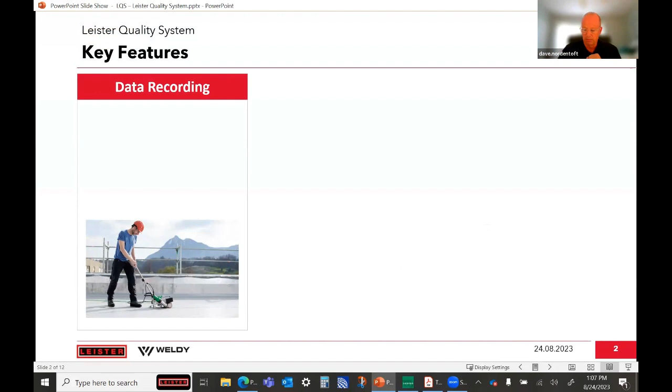So what's happening in the background of any LQS-enabled machine is we are recording the key welding parameters, such as the temperature and the welding speed and the air volume. Every time that the nozzle is inserted and the welding process begins, that information is being recorded in the background on the machine. And the machine has in excess of 7 gigabytes of space on it. So there's the capacity to record thousands of records on the machine. And so we're tracking these key elements every single time that the nozzle is inserted.

But we're also tracking another key thing that is really kind of the first time that we've been able to do this. We're tracking the incoming voltage that's coming into the welding machine. And what we have found in many instances where there's quality control problems or machine performance problems, it's tied to the power supply that's coming into the welding machine.

So these are all machines that are operated on job sites, all off of portable generators. And what we find is that there's quite a range of quality in the generator side of the business as well. And so it could either be a poorly maintained generator or the improper line cable or any combination of that that can ultimately impact what's happening with that welding machine. It can cause damage, but even if it's slightly improper voltage, whether it's over voltage or under voltage, we found that it still can impact some of these welding parameters. And at the end of the day, if the operator isn't aware of some of these changes, then it can impact that quality, but they wouldn't even really be aware of it.

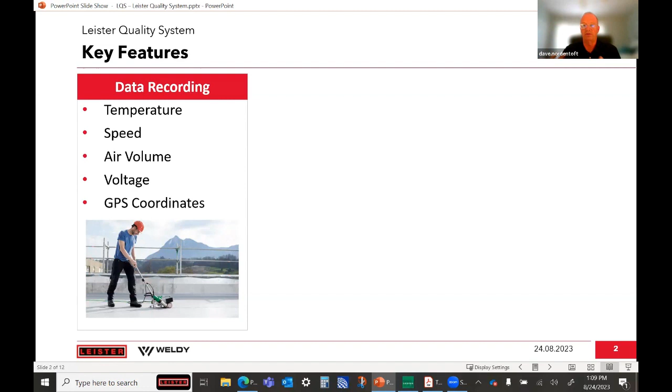So now we're recording this information in the background, and so we can find and be able to track that information. And also at the same time, we're capturing GPS coordinates. And really we're doing this as a way to be able to say, okay, we're working on this project. We're capturing the GPS coordinates at the beginning and the end of each welding seam, again, to sort of corroborate this is where we've captured this information. This is where this information is coming from.

So we're able to take and harvest this data and analyze it. So there's a tool, a mechanism within the My Leister app that allows for the data to be analyzed on screen, whether it's through the mobile device or through the desktop. And then at the conclusion, we're able to take this data that's been harvested and create a data report from it. So it's the ability to create a PDF or CSV file that is, on one hand, an archive record of what transpired during the welding process on a project. At the same time, it's also shareable.

So if there's any other individuals that may have an interest in what happened with this welding process, perhaps it's a building owner, perhaps it's an architect or a roof consultant, perhaps it's someone from the manufacturing community that may also either want or need access to that welding data, it's shareable to anyone who would want to have access.

The contractor has the ability then to use this as a tool as well. Say, okay, I possess this data. At the end of the project, let's go back, let's review the data. If there's any anomalies, anything that looks like it's out of line, let's use this as a tool to go back one more time. Let's check to make sure that everything looks good from a quality control standpoint before we take our last step off of this roof and move on to our next project.

The other thing that happens, let's be honest, sometimes it could be years down the road, could be incidents that happen, something happens that maybe questions workmanship or quality down the road. This contractor now has an archive of what they did, which would capture all the information about temperatures and speeds and that sort of thing, and they can come back and they can say, here's what we did.

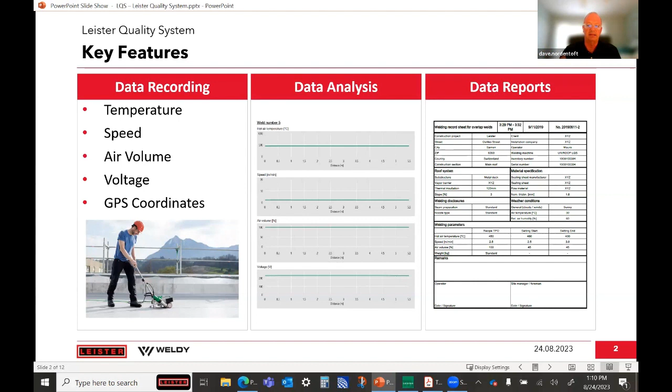One of the other key features in the machine is a feature that we call Monitored Welding Assistant. So what Monitored Welding Assistant does is give the user the ability to go into the display and set parameter limit ranges plus or minus for those key parameters like the temperature and the speed and the airflow. So they can create a range plus or minus from those set points.

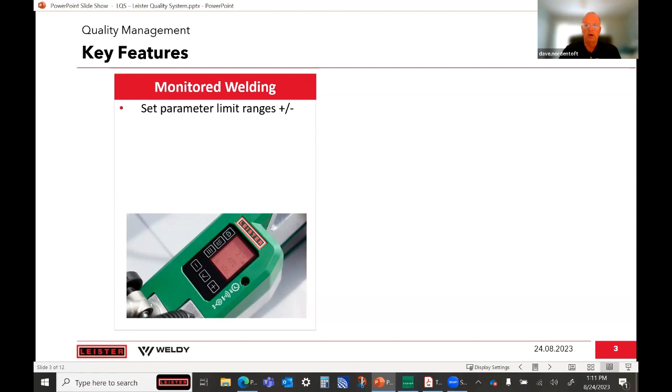The thought process behind this is that, if there's anything that happens during the active welding process, whether it be a mechanical issue or electronic issue that would take one of those settings and move it outside of that parameter range, you're going to get an audible alarm and a visible flashing red display that's going to provide information in real time to the operator that would say, hey, whatever's happening here may possibly affect weld quality.

Our temperature has changed beyond a certain point. Maybe we've moved outside of our welding window. It's possible that whatever's happening here could affect weld quality. So the thought process would be, let's stop the welding process. Let's assess conditions. Let's take corrective actions before we continue the welding process any further. So it's a bit of a stopgap measure right there, right in real time to tell the operator, we should stop the welding process. Let's assess before we go any further.

There's an additional feature that's built in as well. They choose to activate it. It's called Stop Device on Alert. It's tied directly to this monitored welding assistant. So if Stop Device on Alert is active, that monitored welding assistant is activated and the operator takes no action, within 30 seconds, the machine will then go into shutdown and cool down mode. So again, as a safety net, to just say, hey, listen, something's happening here that we should not be continuing. The machine will shut itself down.

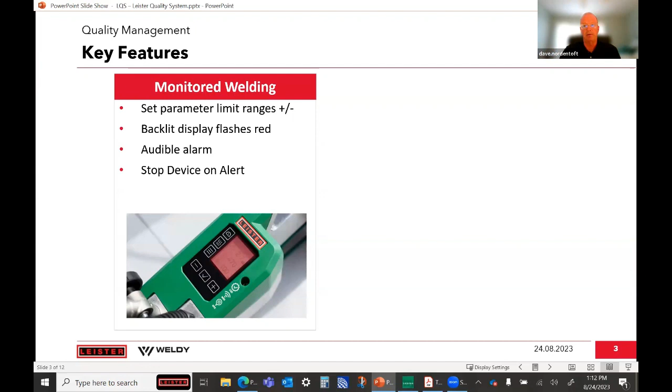One of the other key features to the machine is what we call recipe management. So what this allows users to do is create their own custom welding recipes. Really all we're doing is creating combinations of temperature, speed, and airflow. And so you're going to have different ambient conditions. You're going to have different membrane mil thicknesses and that type of thing. And so it requires different combinations or recipes of those three welding parameters.

And so the user then has the ability to go in and create these custom recipes right in the Leister app. Those can be then transferred and saved onto the individual machines. Those recipes can be saved directly into the display as well. But what it allows you to do is, let's say you have 3 machines, you can create these custom recipes and you can drop them onto all 3 of the machines that you would have in your fleet. And that way, everybody who's operating is kind of, in a sense, working out of the same hymnal.

So if we're working on a hot summer day and we're using say a standard 60 mil TPO, the superintendent or whatever can say, okay, we're going to use XYZ number 1 today as our starting parameter. And again, I kind of stress that these are starting parameters, right? Because we get asked very often by users, what welding temperature should I be doing? What speed should I be doing? And it's really almost an infinite combination, and it's unique to the individual day.

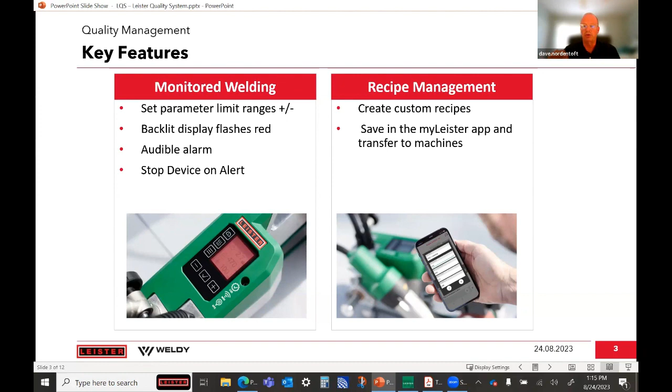So it's like, if I think that self-driving is the be all end all, and that I'm always going to get into a vehicle that's self-driving, I'm going to make it home safe. So go ahead, Dave, go ahead and sleep the rest of the way on the way home. I would be very stressed out about that. And I equate this to the same thing. It's like, yeah, these technologies are fantastic, but it doesn't remove the end users from taking the responsibility for quality management, quality control, and doing all the right things and following all the best practices that they've learned in the industry.

So how does someone get started with the process? So step number 1, if you're going to be buying your first LQS-enabled machine, you want to download the Leister app. It's available on Android, iOS, or Windows versions. So you can run it on a mobile device, a tablet, a desktop, or a laptop. And step number 2, after the app is downloaded, is to create a Leister cloud account. I typically recommend that users consider creating a generic Gmail account that could be a universally shared login for those in the organization that might ultimately need to use this data. So moving beyond that, just to give you an idea, after the app is set up, this is what the dashboard looks like on the mobile and the desktop versions.

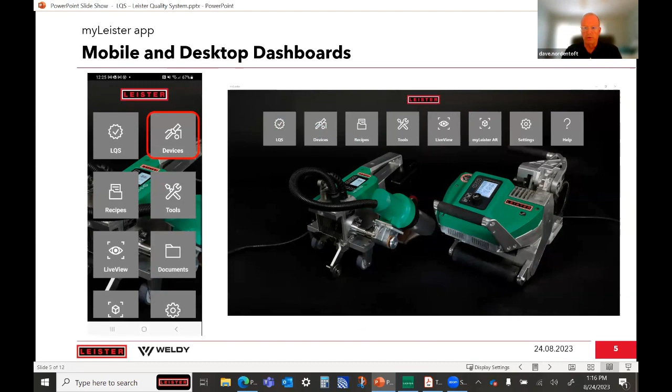So I own my device now. What's the next step after I've set up my cloud account? It's time to start registering the machine. So they would use this device icon to enter into the menu system within the system. And you'll see there's an opportunity then to hit register new machine. At that point in time, you just follow the on-screen prompts. And now that machine is going to be paired to your cloud account.

So a lot of people ask, well, how does the communication take place between my mobile device and this new welding machine? Well, it utilizes Wi-Fi technology. So each machine will put off its own unique Wi-Fi signal that will be picked up by the mobile device running the Leister app.

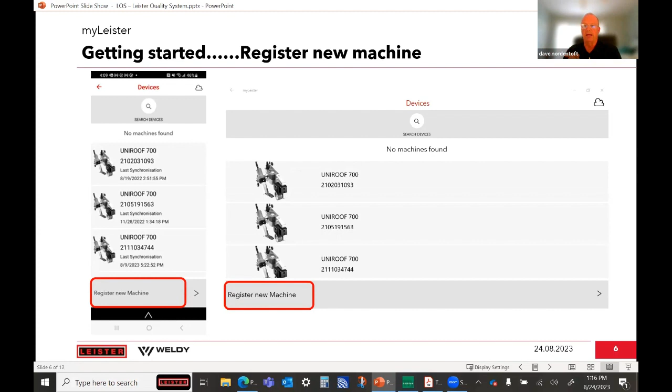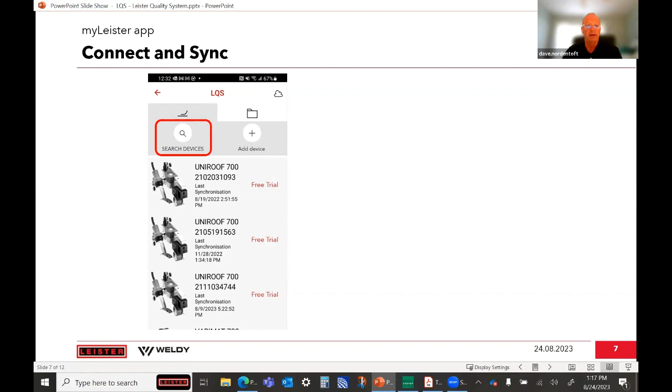So when it's time to connect and synchronize, it's as simple as going into the app, into the LQS portion of the app, and clicking on search devices. At that point in time, the mobile device begins to search and look for that Wi-Fi signal. The machine needs to be on in order to do that. And so when that connection is made, what they'll see then is the machine turn green. So that's an indicator then that that machine is actively connected to that mobile device running the app.

So let's just say that on my first time I've used it, I've run my series of welds that day, and I'm interested in getting access to that data. Well, how does that happen? How do I get a hold of that information? Because right now it's on the machine.

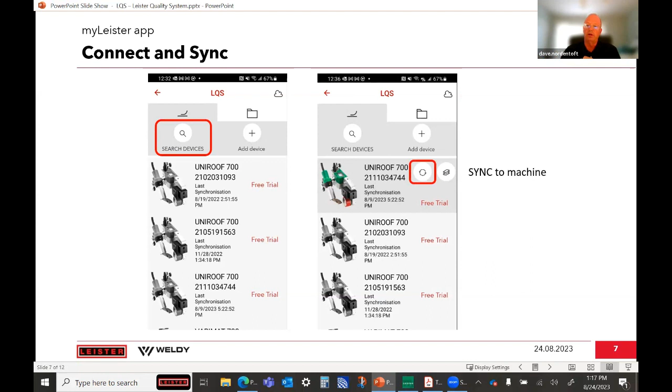So the next step in the process, now that I've connected to my machine, I'm going to do a synchronization. So I'm going to sync to the machine, just simple click of that button right there. So what that'll do is it'll pull the information from the machine. It'll bring the data into the app on that mobile device. So really all the mobile device has to be is within Wi-Fi range of that machine.

And at this point, a lot of people will ask, well, how often do I have to do this? I mean, do I need to do this every 10 minutes? Do I need to do it once a day, once a week? It really is up to the end user to decide how often they want or need to have access to it. There's really no hard and fast rule about this.

So after this information is in the mobile device, it's currently only in that one mobile device. So no one else has access to it. It's just on that one device. So the way that it gets shared and becomes shareable with everyone who is a user or a potential user is to then synchronize this mobile device to the cloud account. So in the upper right-hand corner of the app, you'll see a cloud.

So when this mobile device is in the presence of a Wi-Fi signal that has internet connection, so let's just say we are connected to our machine, we shut the machine off, so we cut that Wi-Fi connection. It doesn't have to be immediately, it could be when you get home or when you get back to the office or wherever. When you're in the presence of an internet connection via Wi-Fi, you hit that cloud, and then it takes that data and it puts it into the joint cloud account.

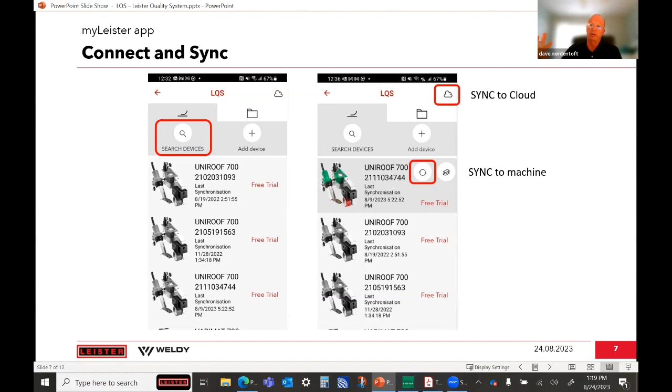So that now anyone else could be in the office, could be in an office in another state. If they're running the myLeister app, they use that joint login credential, log into their myLeister account, click the cloud to sync to the cloud account. That information then comes into their app version. So they can look at it again, whether they do that on a mobile device, whether they do it on a desktop, doesn't really matter.

So what's it look like when we want to review and take a look at the data once it's been pulled from the machine? So again, we're in the LQS portion of the app, and we click on the machine that was just used. You'll see the date stamp and the records that were pulled at that time.

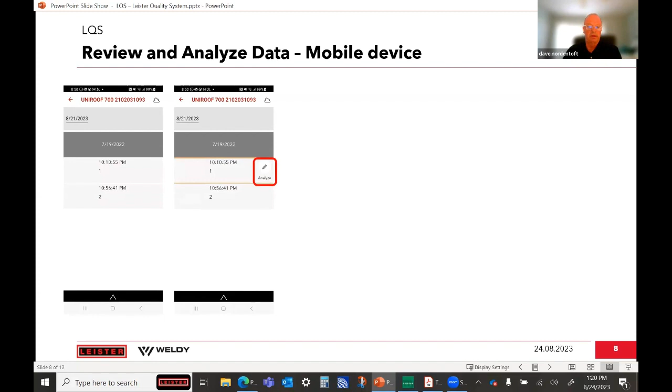And so if you click on the first line, line 1, there'll be a button that'll show Analyze. So this gives you the ability to analyze the data right in the app. So again, you can do this from the mobile device. You can do this from the desktop version. We're on the mobile device today.

So after I click Analyze, the next screen that I will see will be a table. And it's a table that allows the user to basically archive and document all the details about the project they're working on. So there's an opportunity to click Add, which will be a way to name and create their project name that they're working on.

And so it gives the opportunity to all sorts of information that could be populated in there about your company, about your client, about what kind of roof system is being installed, from membrane, the roof deck, ambient conditions on that day, you name it, A to Z. There's even a comment section at the bottom to add any other remarks that would be notable and something that you would want to make sure that you were documenting on that day. So to move beyond that screen, you're going to have to name the construction project in order to be able to move past the screen.

So you click Next. That'll take you into your first welding record. Okay, so what the welding records look like are basically like a series of EKGs. There's an individual graph for each of those captured parameters. We talked about temperature, speed, airflow, and the incoming voltage. So it's a drop-down menu that allows you to move from weld to weld, each one independently showing what was documented for those 4 key welding parameters.

And then finally, the last is a screen at the conclusion that would be kind of a summary record of all the different records that were pulled in. So I know in my particular instance and in my vision, I prefer to view the data whenever possible on the larger desktop version.

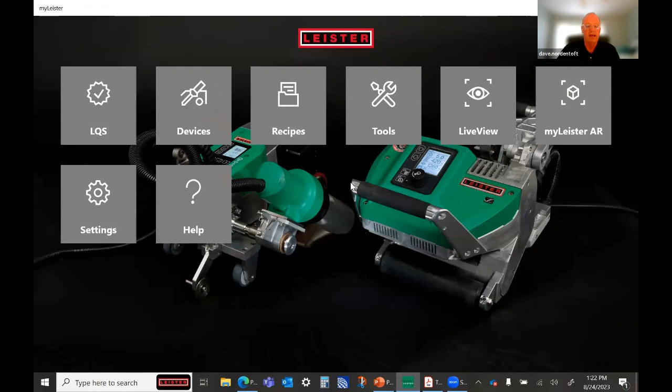So what I'll do is I'll take an opportunity here to kind of walk you through what the desktop version is live. So I'm going to go ahead and jump to my Leister app that I'm running on my computer, and we'll kind of walk through some of these same screens again, just to give you an idea as to how easy this is to work with. So again, if I want to view and analyze the data, it was as simple as going into the LQS tab, where I see the machines that I have in my inventory.

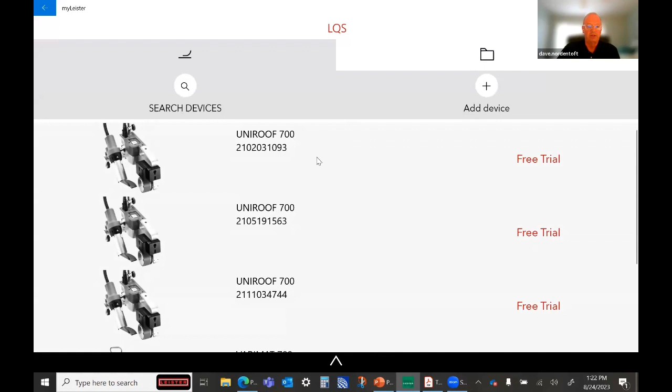So I'll go ahead and click on this first one, and it'll give me, again, the opportunity to take a look at the welding records. So if I do this, I click and I analyze. So I can analyze, again, right on screen. So this is the table I was mentioning before, where I have opportunity to document all the different information about the project. Now, I took the liberty before I started today to name a new project, the RT3 project.

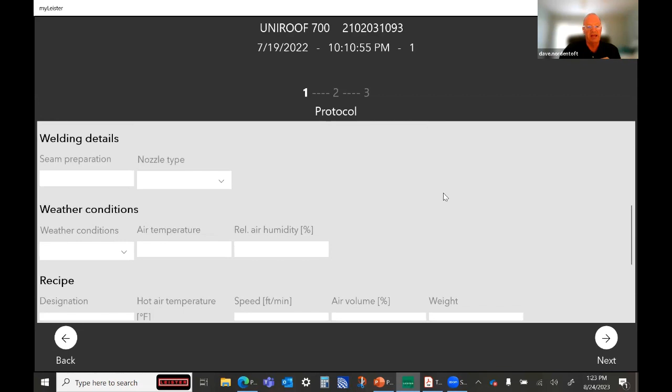And so what this allows me to do is create this project. And let's say this project goes on for 2 months. Every time that I retrieve data and I want to move it into the My Leister app, it allows me to go back and simply refer back to the same project that I'm working on with the dropdown, rather than creating a new one every single time I do this. It keeps it all together. So again, this gives you an idea of all the different information that we can populate in and save relative to the work that we're doing.

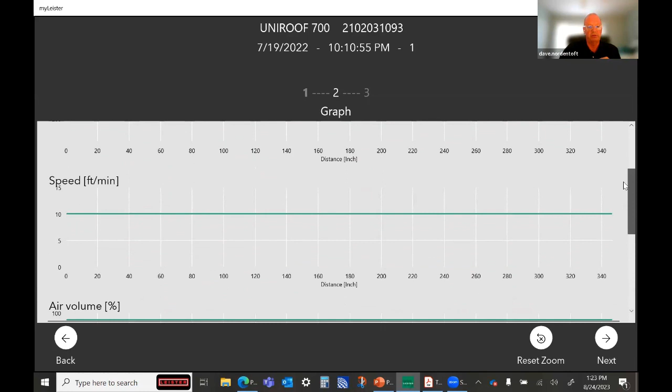So then to move beyond, we simply click the next, and this gives us our first welding record. So again, as I mentioned, you're going to see each of these parameters documented over distance. So what we're looking for, ideally, under ideal conditions, right? We're looking for nice, straight, flat, consistent parameters. No deviations, no anomalies. I know normally when I use the EKG analogy, we normally say, yeah, in this particular case, we're looking for flat line. Normally we're not, right? But today we're looking for flat line. So this is something that I wouldn't be that worried about, right? Everything nice and consistent, including my incoming voltage.

Okay. So let's take an example of a case where maybe we had something happen on one of the welds where the monitored welding assistant activated. So let's say we were actively welding and something happened that took one of our key welding parameters, again, outside of that range that we had established going in. Well, when that happens, that information is also archived and shown in the data report. How does that look?

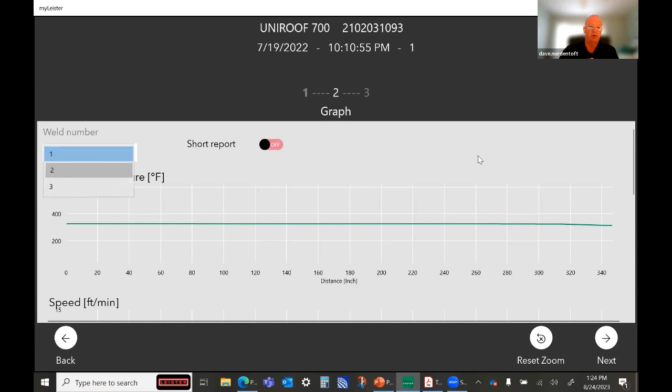So I go to weld number 2. Let's say the monitored welding assistant went off because there was a temperature deviation. It would appear in the data table like this, okay? And again, it's over distance and time, so we would see that over these distance intervals, this is where we had our incident.

Now, one of the things to think about, we would hope that these would be relatively limited in scope, because again, the thought process was when that monitored welding assistant went off, we stopped the welding process and we didn't continue to go. And so we would hope then that people took the corrective action necessary at that point in time and mitigate the amount of time that we were outside of our desired parameter range. Okay. So again, the next one can be viewed. Again, this one appears to be normal, as we would hope and expect.

So I have this data, but really what I probably care about the most is any of the data where there's these anomalies or these issues that potentially would have come up. So we can get to our information on this much quicker if we utilize this feature called short report. So if I click on this short report right here, what this does is it filters out all the welds that would be categorized as good. Those are the green flat line ones. And so now the only thing that's going to remain in my drop down will be any of the ones where we had an incident. So it helps us sort of just drill down right away and figure out where we think we had some incidents. Okay.

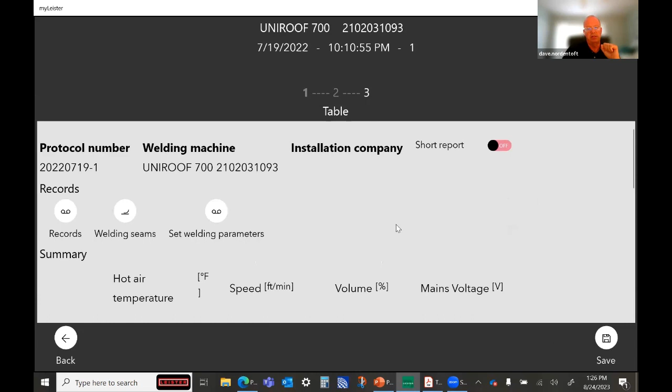So we move on beyond this into the summary table, where we have some different information still available at our fingertips. So if I go into the records tab, for instance, what this shows me, again, for each weld, it shows me distance intervals, and it captures a snapshot in time at that distance down the seam, what my temperature, speed, airflow, and voltage was, as well as my GPS coordinates. Now, in this particular example, I didn't capture any GPS because I was running this indoors, so I didn't have a GPS signal. So that's weld number 1.

And if I want to check weld number 2, I'm capturing the same information, but I will notice here anything that shows up in red would be an indicator that I was outside of my parameter range at that certain distance interval. Again, this is just a way to be able to narrow down and focus where we think there may potentially be a problem. Maybe there's not, but we're going to be able to use this information as a safety net to go back and say, hey, let's go find weld number 2 and let's double check that seam again and make sure that we're all good before we take that last step off of our project, and so forth.

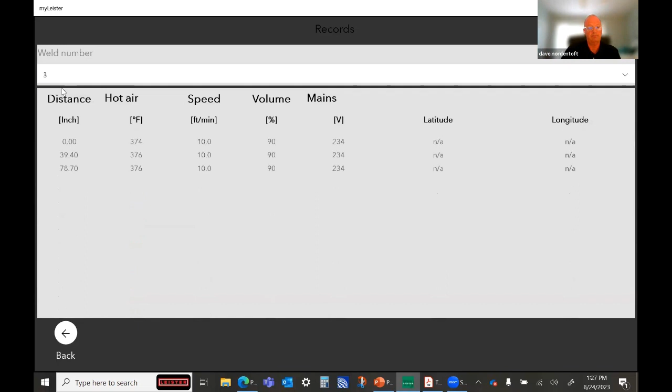The welding seams tab right here, if we go ahead and click on this, one of the things you'll notice here is we have each individual seam numbered, and it provides us the total distance of that seam, also latitude and longitude. Now here, this is the oh, by the way part of the technology that I also like to make sure that I point out to contractors, because this gives a contractor an opportunity to actually pull productivity information out of this. Now, we didn't really build this as a productivity tool or a productivity measuring tool, but the oh, by the way is it's there, right?

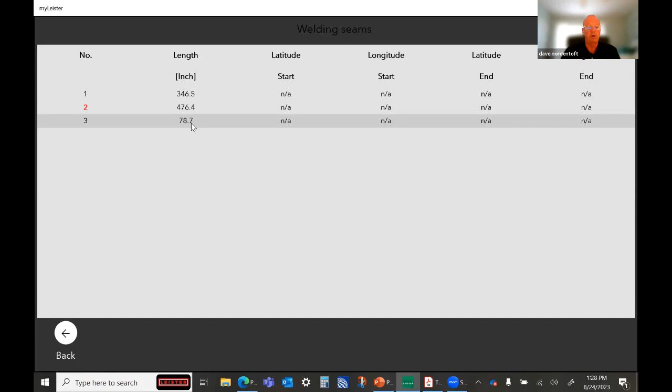So if I harvest my data, let's say at the end of every day, I can go back into the data and I could say, okay, well, we did 21 welds today and it totaled X number of lineal feet. Well, I could begin to use that as some sort of productivity gauge. So, you know, we didn't bring it out as a productivity tool, but it's certainly worth mentioning to the contractors.

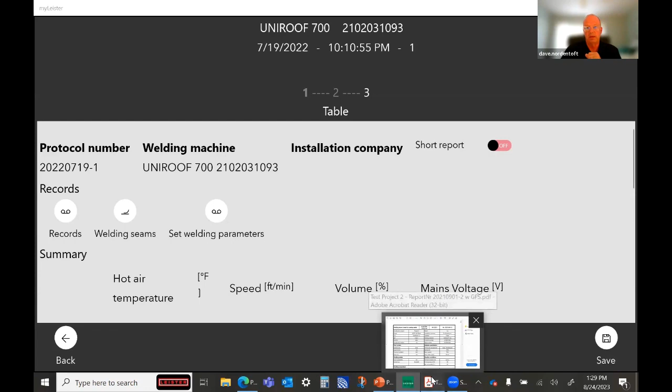So when I'm all done viewing and looking at my data, I have the ability to save it. So I simply click down here on the save button, and that allows me to save this as a PDF or a CSV file, so that I can archive this or share it, should someone be interested. So once I've created and shared, I will share with you what a finished data report looks like. So again, this comes up in PDF version. So again, here's my table that I described earlier that captures all the information that I populated in about the project.

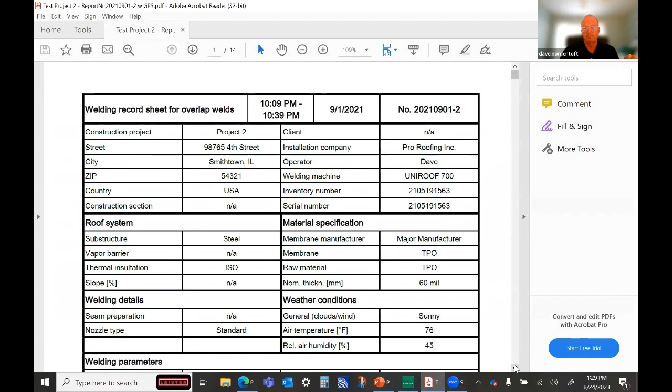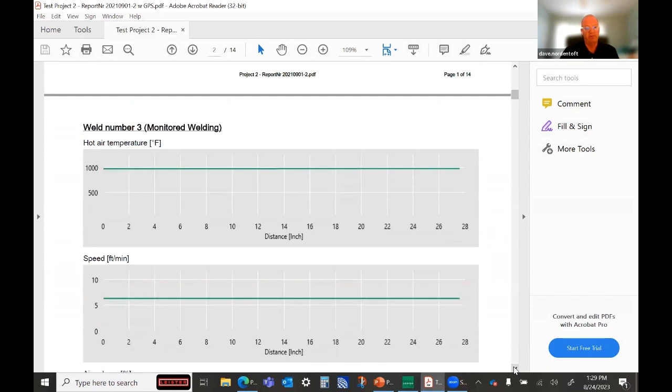It's going to show all the summaries. It's going to show each weld, and the same information that you were able to look at on screen, you now have in PDF form. Now, one of the things I want to point out here is that we have the same summaries as I pointed out before, but in this particular instance, we have captured latitude and longitude.

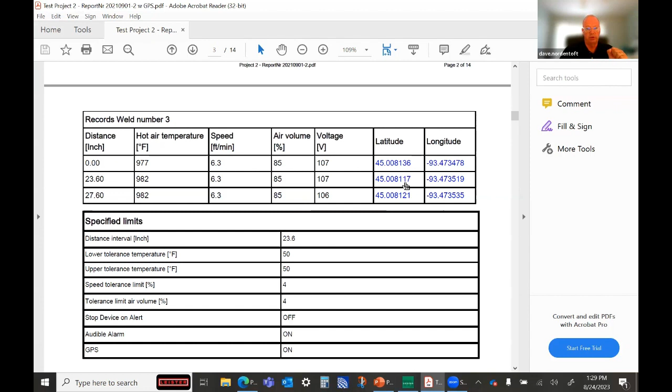So in the PDF version, all the latitude and longitudes are hyperlinked. So we have the ability to go in and click through, and this will take us through to Google Maps, and it will drop a pin on the location. So in this particular case, we go ahead and we can zoom in.

GPS technology being what it is, I don't think it's going to drop us within inches of our seam, but it is going to place us probably within about 10, 12 feet or so of our welding seam. Just to give you an idea, on this particular example, I was welding right here as a demonstration right on this garage apron, and I'm about 10 feet away from that pin.

So we've been asked before, well, how, as a contractor, am I to be able to identify weld number 2, if that's the problem weld? We don't possess a software program where, as we've been asked before, we can do an as-built drawing. Can we do an overlay where we're able to see our welding seams overlaid on Google Earth or a Google map? We don't possess that ability today.

So we're telling contractors it is going to be incumbent upon them to do their due diligence and kind of map out and lay out and track how they're doing their welding on each different section of the roof, so that if and when they need to compare and contrast against a data report, they're able to go back and follow what they did and do that check.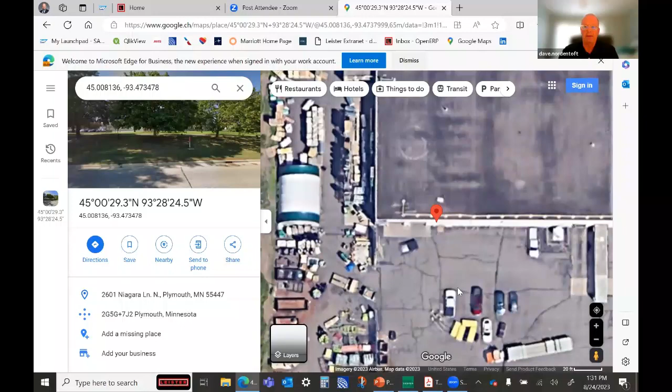There is a question in the chat that says seam preparation is the equivalent of the test weld, correct? And could we upload a photo to attach to the report? I'm going to have to probably double check to see if they have the ability to attach anything to it. But I think it could still be bundled so that it's together, and date and time stamped so that things can be correlated. But I will have to double check, and maybe Karen, I'll work back through you to let you know if there's a way that we can have something else added in externally into the report.

But yeah, the test welds, that's something that I've spent quite a bit of time with different material manufacturers working through their training programs. That's a drumbeat that they beat all the time, about doing the due diligence at the beginning of every day or any major break. Don't make any assumptions about what's going to work this time. Test it again. Make sure you're probing all your seams again. It's just a best practice that this doesn't substitute for. It just enhances it.

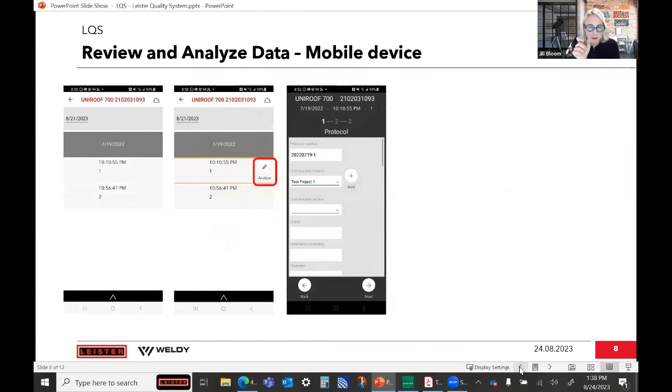So Dave, can you show me that report again? When you have an improper weld, can you show that to me again? Absolutely. I'll just back up in your presentation. So it shows up red so the contractor will know? I want to make sure I understand. Let me go into the app and get through it faster.

So when they see this, now it's a green line, so they'll be able to easily tell because it turns red. Is that what it does, if I understood correctly? So yeah, in the data, in this particular instance, Jill, what you see down here on the bottom axis is the distance down the seam. Yeah.

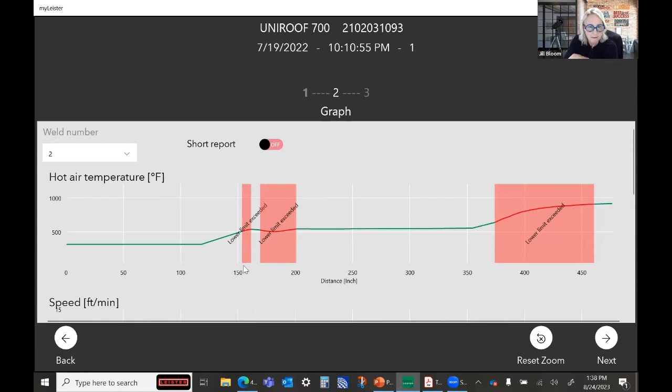So it's showing here that just slightly after 150 inches down the seam, we had our first alarm go off with the monitored welding, and we're basically outside of our limit range all the way up to about 200 inches down. So in that, say, roughly 50-inch stretch.

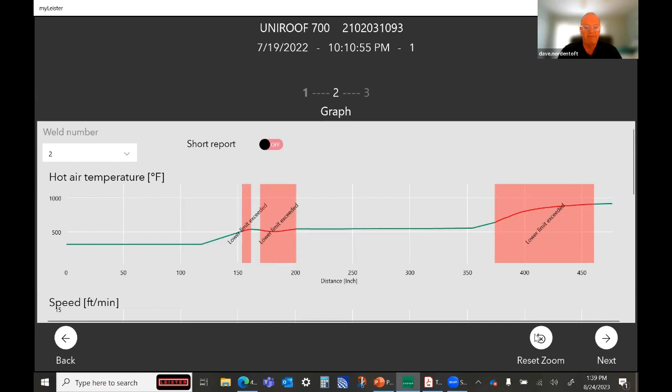So it would be visible not only in the graph like this, graphically, but then if we also go to the records tab, this is also giving us the same seam. These are distance intervals down that seam, and at every interval where we were outside of our range, it'll show in red, like it's right here or right here.

So we know that 153 and 157 inches down the seam, the machine was telling us that at that moment we were outside of our parameter range. And basically it also really continued on from 169 all the way down to 192. So this would be what I would lean on right here. Yeah. I know it's weld number 2, and this will tell me the areas where I was outside of my range. I would probably, as a best practice, stretch that out beyond that, but yeah, this is where I'm going to pull the data from.

So does that mean that the heat wasn't quite right at that moment? Is that what causes the alarm to go off? Yeah. So let's just say I set my range at 36 degrees Fahrenheit plus or minus. So let's say I set at 1,000 degrees. So once I'm at 1,036 or 36 below that, that's what's going to trigger that monitored welding. So I could be in that range and still be okay. But once I surpass that 36 degrees plus or minus, that's going to trigger it.

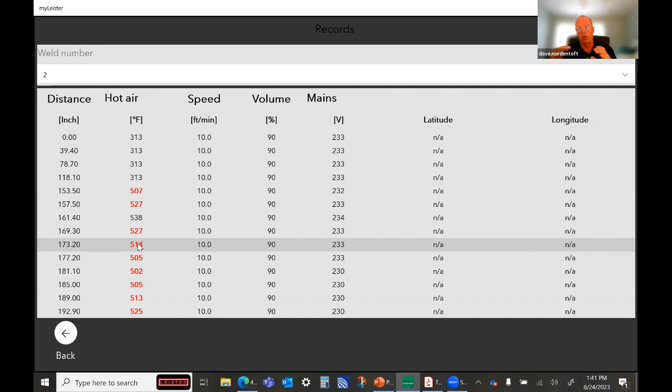So it's really up to the contractor to have a feel for the membranes they work with and how friendly their welding windows are, right? The material manufacturers have worked hard over the last several years to tweak their formulations and make their membranes very, very friendly over a lot of different temperature and speed combinations. And so it's just up to the contractor to say, where's my comfort level? This is where I want to be. But if I go beyond this point or this point, then I'm going to be a little bit concerned.

This isn't even going to guarantee that it's a problem. It's just warning you that it's outside of that range, your comfort level, right? So you might go back and it might probe out fine. You might even do a cross T-peel test, and it might peel out fine. We're all good. We'll have to patch it, whatever. So it's not going to guarantee that it's a bad weld. It's just going to warn you that it's worth checking.

And how hot does it need to be to actually catch the roof on fire compared to the heat that you're at? I don't necessarily possess that exact data. We know that it's under extreme conditions. Let's say that a nozzle's inserted, but something happens that affects the drive, or it's an unattended machine. These are typically mostly negligence-driven issues. PVC doesn't have the same level of flammability, I believe, that TPO does. But nonetheless, it becomes very evident very quickly.

And again, because of the way that we've advanced the machines, we have conversations with contractors all the time about where do you really need to be today to be successful in the welding process? Because I think especially in the case of TPO, you can actually run these machines too hot. I know they're able to go up to, say, 1148 degrees, but the membranes are very friendly today, and sometimes you end up getting much better welding results at lower temperatures, maybe a little bit of a lower speed, and you avoid that concern about scorching the membrane or overheating it to a point where you end up not being able to weld it anymore.